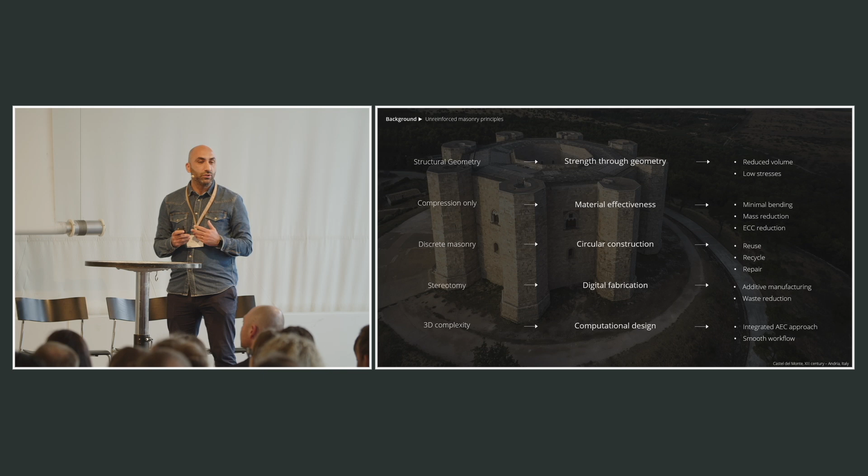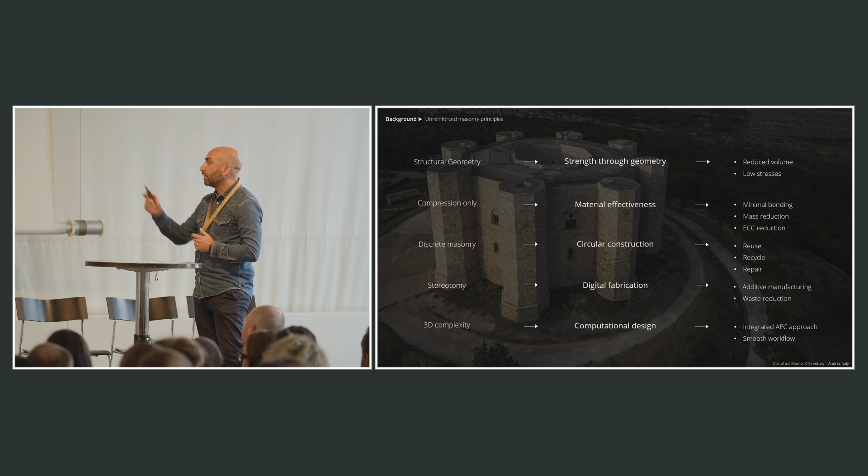The masonry behavior, which is, let's say, influenced a lot by stereotomy, is solved by digital fabrication because we have a certain flexibility of creating shapes through additive manufacturing. And the 3D complexity of masonry is dealt with through computational design. So we could now work with three-dimensional geometries, calculate them structurally, and build up an integrated approach from design to fabrication. So how did we translate this into a 3D concrete printing structure?

First of all, we built a discrete masonry structure working in compression, and we shaped the single components in order to have all the layers always perpendicular to the flow of forces. So you see the layers are not horizontal, but they are inclined, and they also have a different layer height in their development.

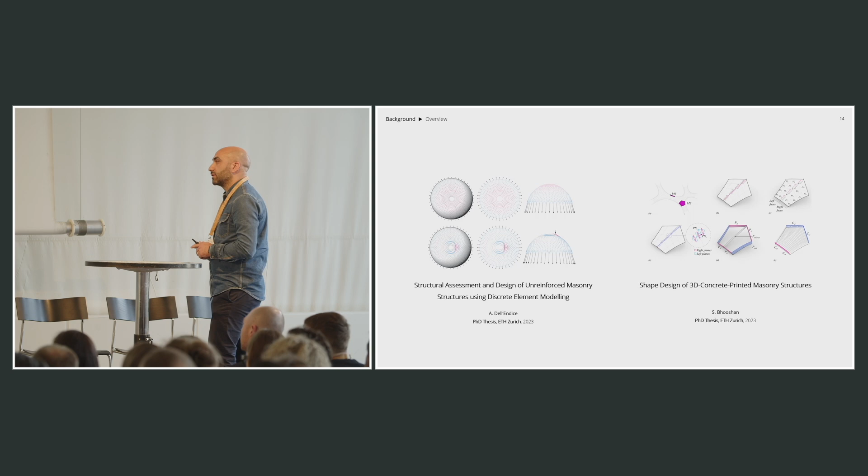This research is based on my PhD at the Block Research Group on structural assessment and design of unreinforced masonry structures using discrete element modeling, and on the PhD of Vishu Bhooshan about shape design of 3D concrete printed masonry structures.

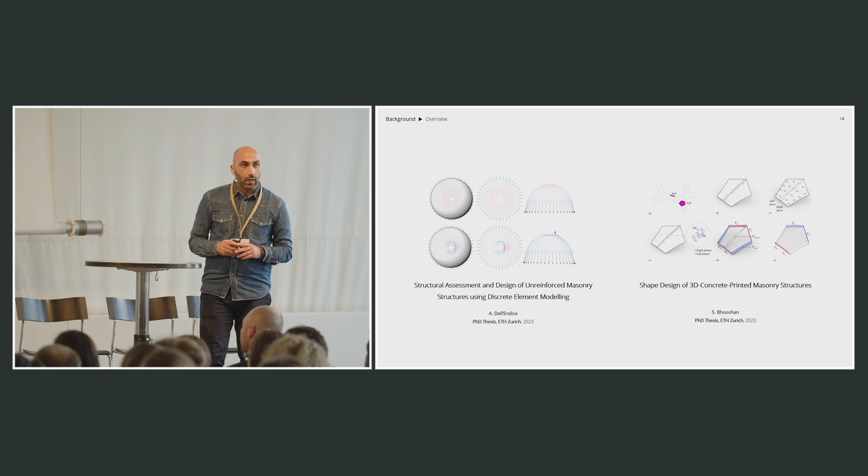When we worked on the first bridge, Striatus, we actually blended these two research lines together, and we generated this really integrated approach from design to fabrication, where we started simply from, let's say, a JSON file containing a data structure, network, and 3D meshes, and then we expanded this mesh. You see, we started with the skeleton on the top left. We expanded the mesh in 2D, and we used this mesh as a form diagram for the thrust network analysis.

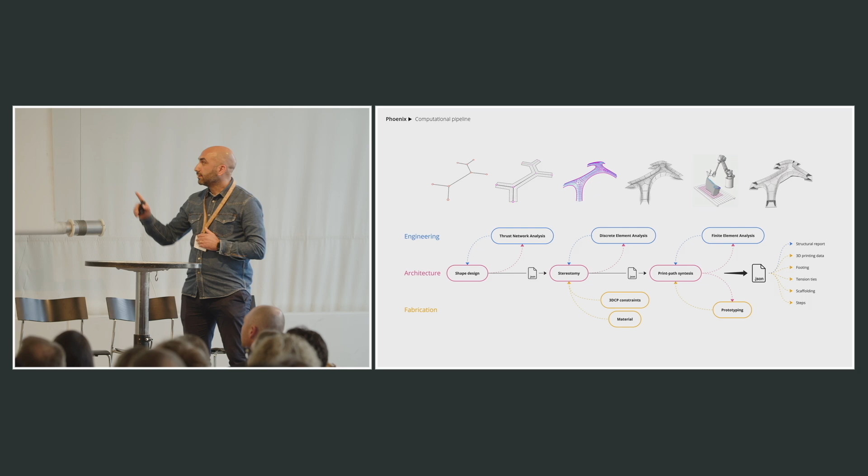So as you can see in this diagram, the structural analysis is interconnected with the design, and we always have feedback loops along the path in order to inform our design process. So after the form finding through thrust network, we gave this mesh thickness, we discretized the mesh, and we checked this through discrete element modeling analysis. So we understand the global equilibrium, the displacement capacity, and the load combinations. And at this point, we also introduced all the constraints coming from 3D concrete printing and from the material properties.

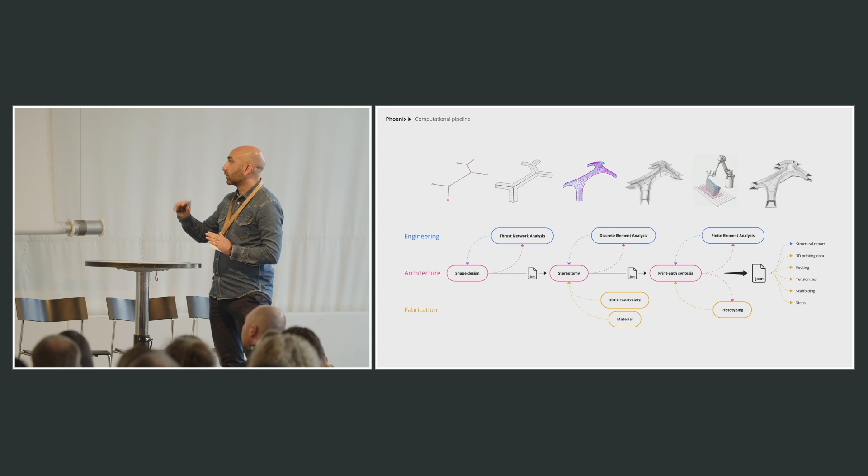And then finally, we checked locally with finite element analysis in order to define the thicknesses of the layers and, for example, the stiffening scheme inside the structure. And we populated this JSON file with all the data for fabrication, for structural reports, and for the robotic 3D printing of the structure.

Now, after the first project, Striatus in Venice, we wanted to improve the first bridge in a second iteration. And we did that not only thinking about how we could improve in terms of transportability, maneuverability, and assembly precision, but also how we could reduce the environmental impact in these structural typologies. So we worked a bit on the equation of the global warming potential. We decided to reduce single-use materials, for example, for the construction of the waffle, the falsework of the bridge. We wanted to reduce the ECC by using a lower strength concrete. And we increased the lifespan by building a permanent structure, compared to Striatus, which was just for the Biennale.

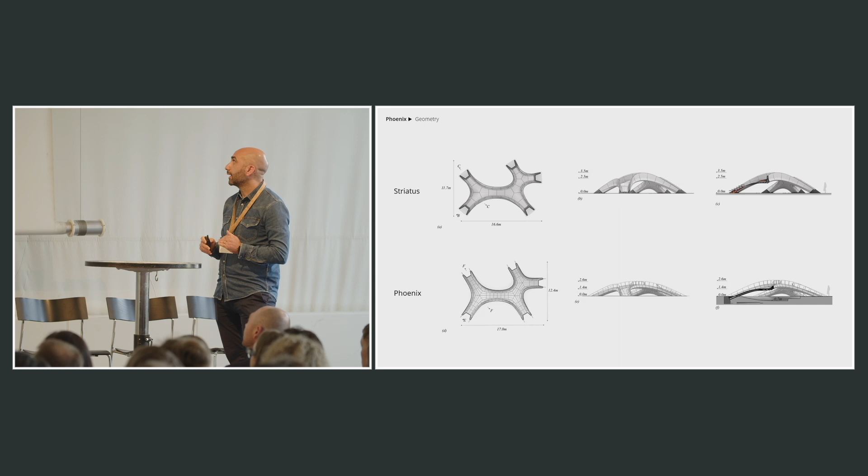So I will now guide you through the different steps from Striatus to Phoenix, and I will list all the different features and the comparison between the two. From a geometry point of view, we slightly increased the span, so the span is almost the same, but this structure, the Phoenix one, is much more shallow, so it's more suitable for a pedestrian bridge, so we could get rid of the timber steps, and we already save some material there.

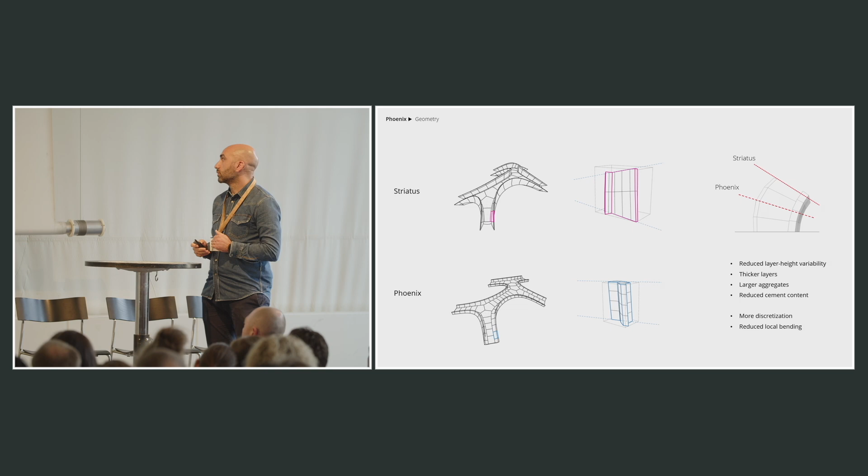But on the geometry side, we also increased the number of blocks, so it's almost double. And by doing this, there are a lot of benefits. First of all, we reduce the angle between the start and the end plane during printing, which can reduce the layer height variability. We could use thicker layers, which means larger aggregates, and also reduce cement content in the mix. But more discretization also means that we could reduce local bending, from a structural point of view, in the single components.

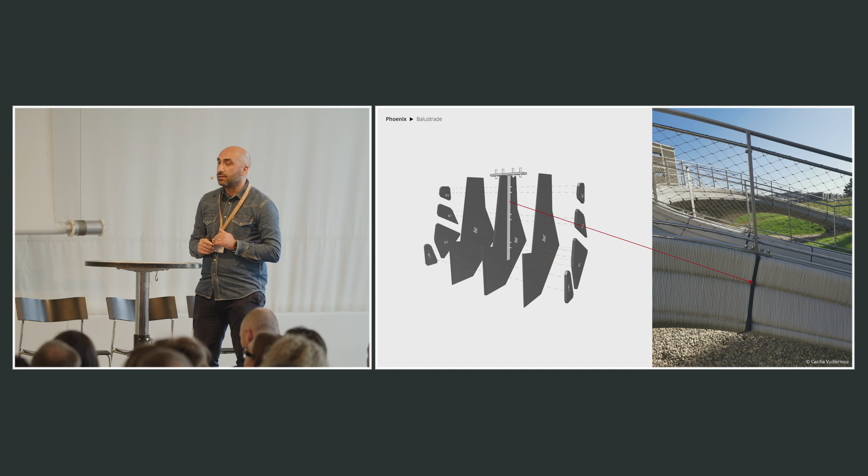In this case, we also integrated a balustrade, a standard steel balustrade, giving more transparency to the project. And we did that by inserting this steel T element in between the components, which is kept in place simply by the thrust flowing into the balustrade arches on the two sides of the bridge.

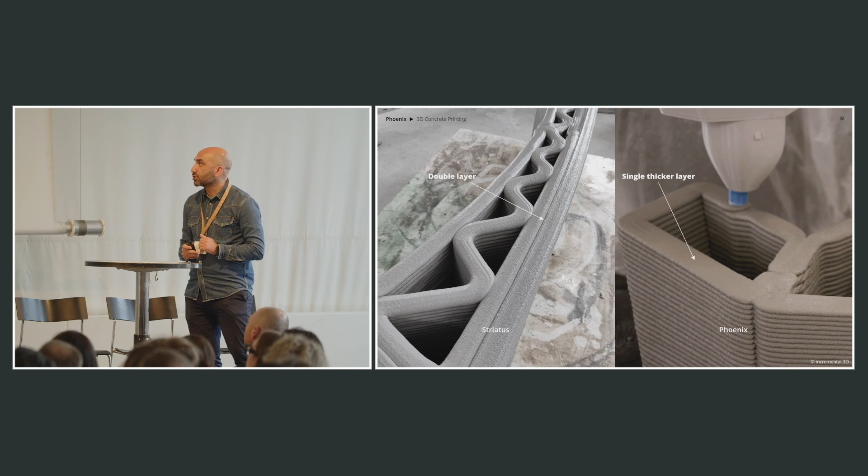From a structural point of view, we increased the global thickness of our geometry in order to increase the equilibrium solution space, especially for point loads or asymmetric loads, which are, let's say, the worst load cases for this type of structure. And locally, we also went from double layer printing, which could give rise to cold joints between the layers, to a single thicker layer running around the 3D printed components.

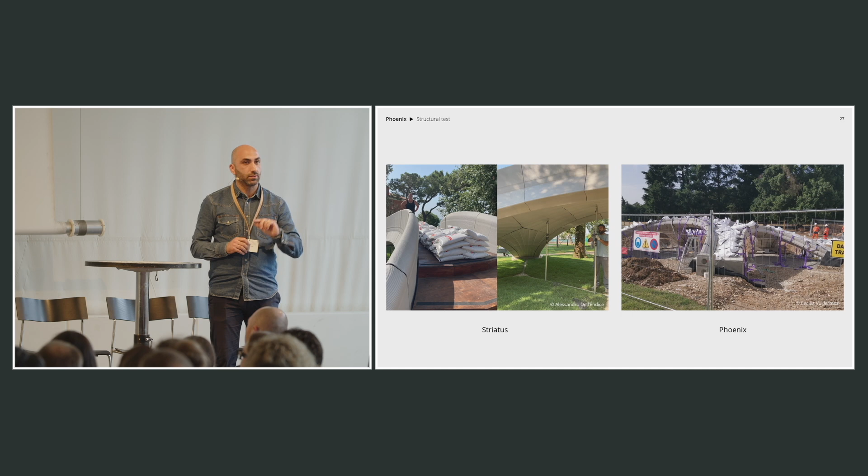And both structures were designed considering all the requirements from the Eurocode, so ULS, SLS, and they were all tested afterward with sandbags in different locations to check basically the deflections under certain loads.

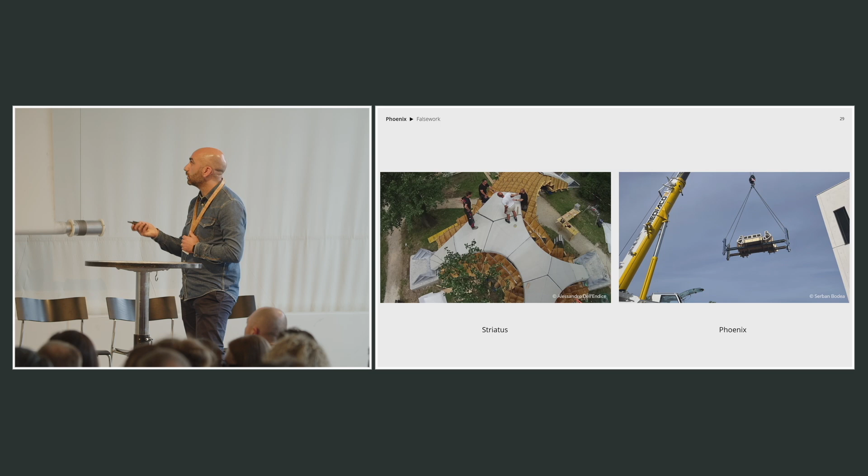On the falsework, we went from this continuous timber waffle with a lot of wood that we built in Venice to a different system with cassettes, which were integrated with commercially available Doka elements, so these blue beams that you see around the components. So we could reduce by 50% the use of wood per square meter.

And we also increased the precision during the assembly because we pre-assemble these cassettes with a few components on top, and then we lift them up on top of Doka towers, which were placed along the skeleton of the structure.

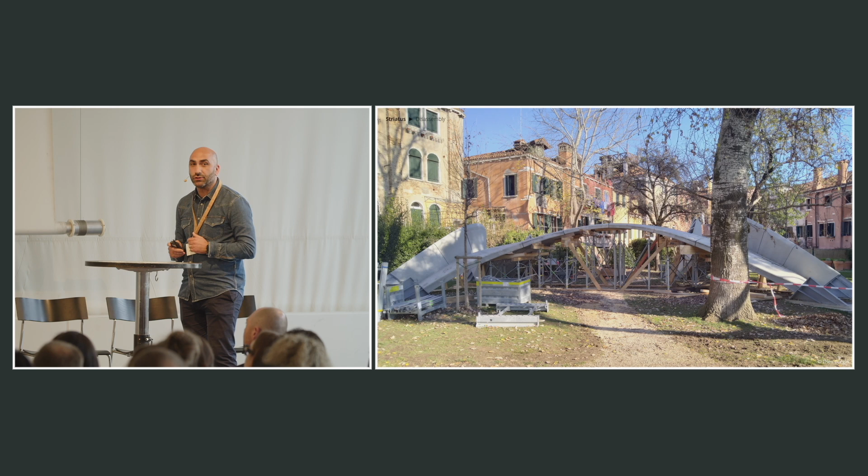On the material side, this is an image of the disassembly of Striatus in Venice. And after disassembling all the components, we smashed these components and part of these particles here were used as new aggregates for the recipe of the new concrete.

But not only that, so the development between Striatus and Phoenix concerned also going from a 90 megapascal concrete, so a high-strength concrete with the maximum diameter of aggregates about 0.6 millimeters, CEM II, to CEM III concrete with 50 megapascal, so we could reduce a lot also the environmental impact of the mix.

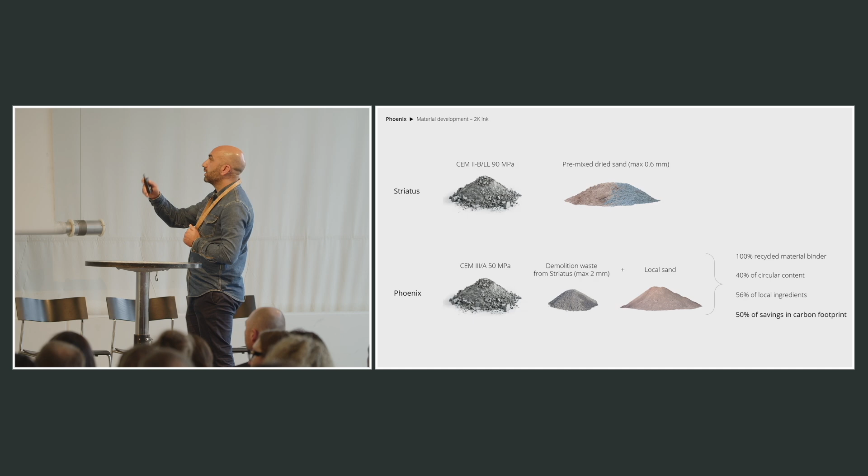Coming from 100% recycled material, we use part of the demolition waste from Striatus. We could increase the aggregates to 2 millimeters, and we actually use local sand. So it was a local sand closer to the plant where we printed the components.

On the assembly side, we changed the strategy. So we decided to start from the middle. This is a bit unusual compared to what is usually done historically on masonry structures. So we started from the middle, and we wanted to accumulate all the imperfections at the latest interface between the last block and the support.

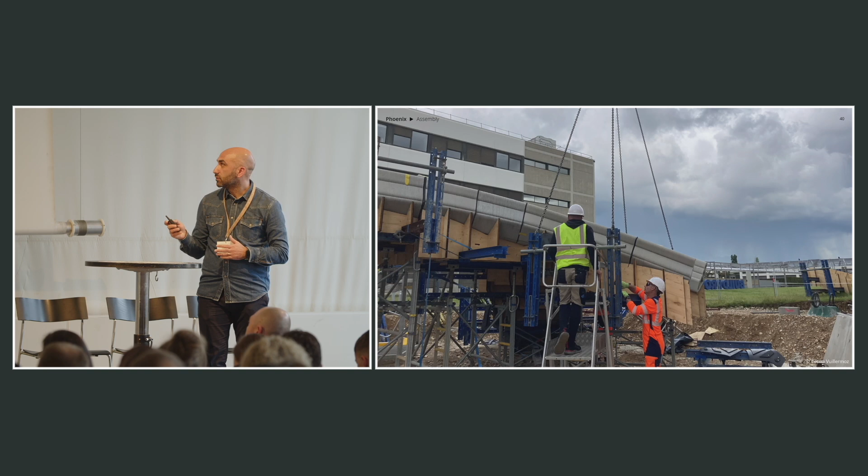So you see here, we proceed from the middle towards the support on the right side, and then we fill the remaining gap with mortar at the end of the process.

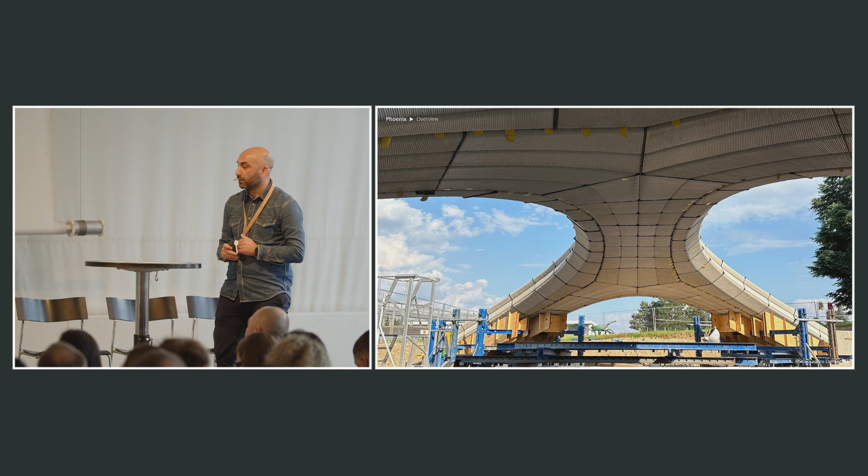Finally, I want to show you just a few pictures of the project. This is right after the decentering. This is the structure before mounting the balustrade, so the handrail on top of it. You see the connectors coming out in between the balustrade arches on the sides. And these are a couple more images in the Holcim Innovation Center in Lyon.

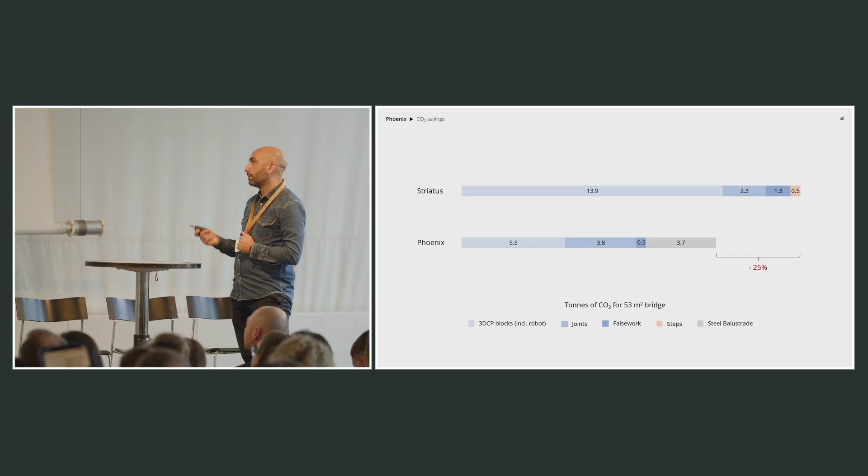And so to conclude, I want to show you this slide, which is showing the CO2 savings compared to Striatus. Of course, here we added the steel balustrade, which is also made of components that can be disassembled, so it's not really connected to the building, so it can be reused.

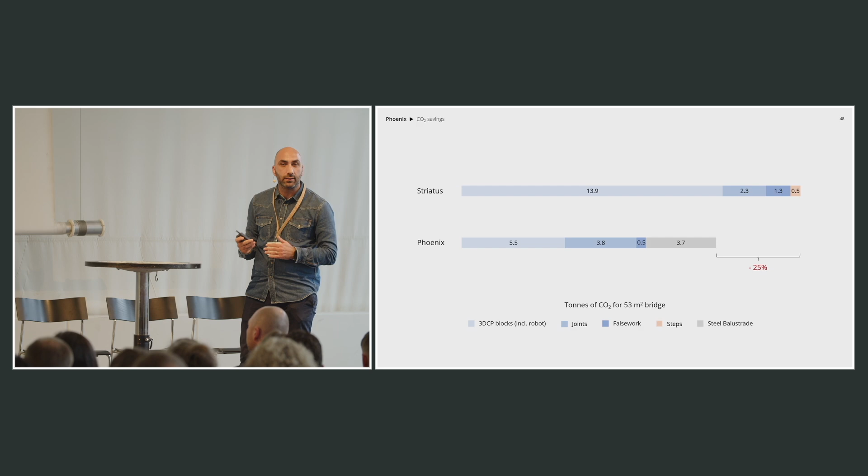And we realized later that there is a big contribution there from the joints, because we doubled the number of joints, the number of blocks, but then we also increased the neoprene pads in between. So this is just to say there is still room for improvement in this process.

And I want to conclude with this diagram, which shows how the implementation of our unreinforced masonry principles together with 3D concrete printing is quite beneficial for circular construction. So in this project, we are using 3D concrete printing as a primary structure. So there are no cables, no reinforcement inside. So we can start with a low emission concrete. We could reduce material because we are using additive manufacturing.

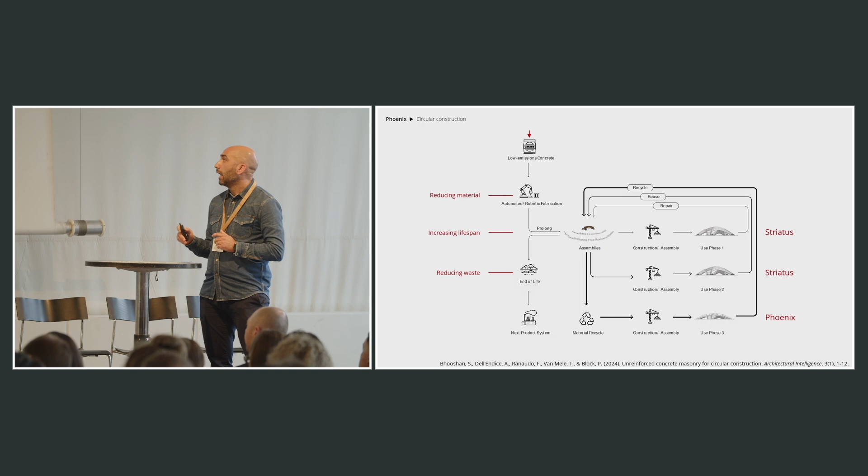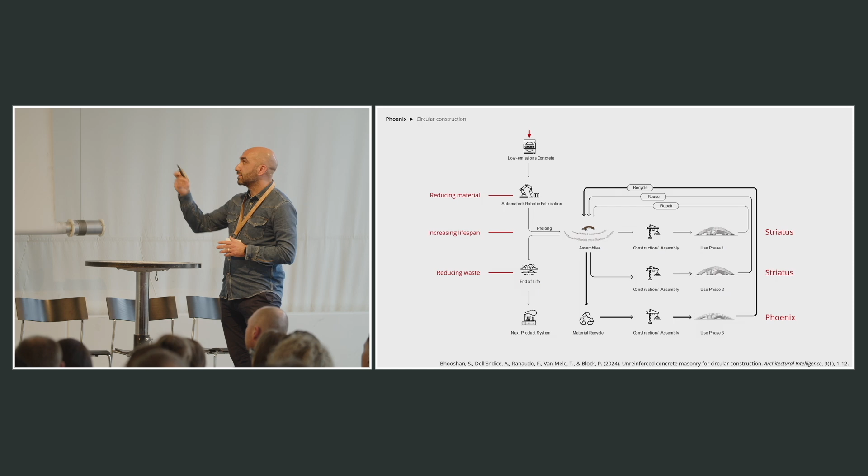And thanks to the masonry principles, we can go through these loops, so we can repair our structure, we could reuse it, so we can disassemble it and move it somewhere else, or we can recycle, as we did going from Striatus to Phoenix.

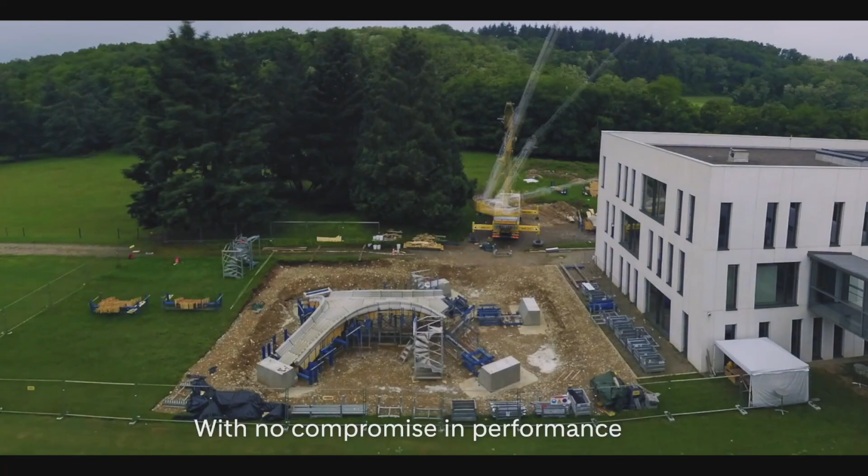This is a 40-second video to show you the final results in Lyon. Assembly of the cassettes, and the assembly starting from the middle, going towards the end, towards the supports.

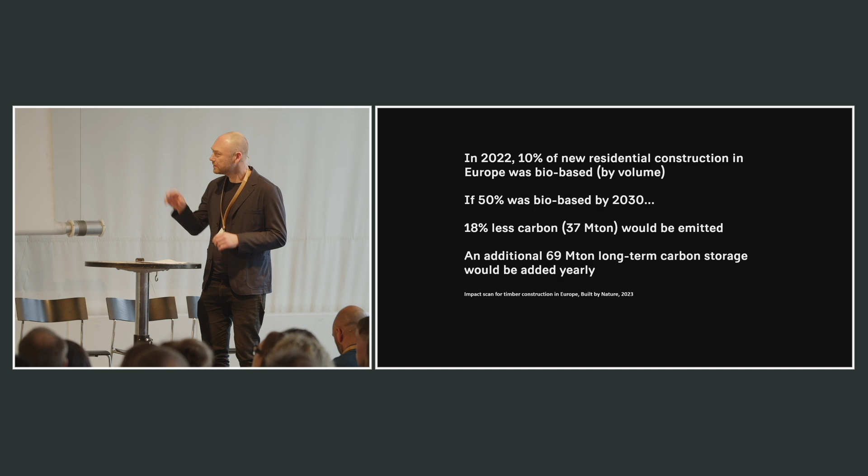But to be able to get anywhere near these very positive impacts, we first need to consider where the sources of these materials might come from. And this raises critical questions of how we should do this within the carrying capacity and sensitivities of our local ecosystems, and particularly how we should do this without simply shifting the burden to another planetary boundary.

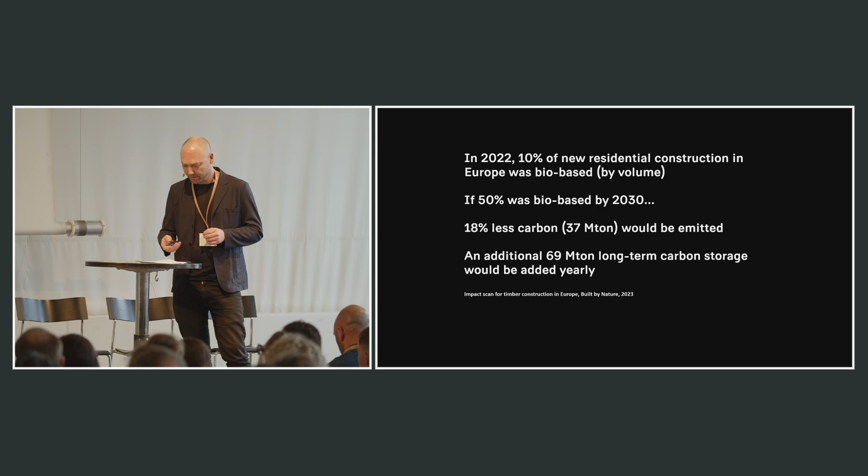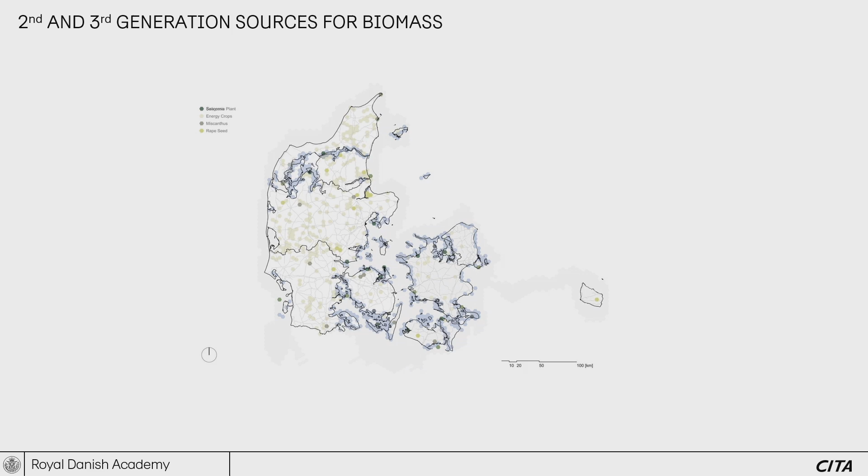So the region that we're in now, Denmark, southern Scandinavia, has a landscape that's about 70% agricultural. It's a fully utilized landscape that's cultivating feed, food, and energy crops. However, this same landscape and the same cultivation practices also generate substantial quantities of what are called second and third generation biomass. So this is the residues, the wastes, the cut-offs, the unused parts of first generation plants and trees, as well as uncultivated biomass such as seagrass.

And this kind of biomass has cycles that are very, very rapid. So a few months to grow, a few months to decompose, and this is even quicker if it's burnt for energy return. So being able to create new slow loops that redirect these waste materials into building elements would increase the overall quantity of biomass that we're able to use within building materials and building elements. It would also sequester their carbon for hopefully substantial periods of time, and it would also reduce pressures on other critical biomaterial resources.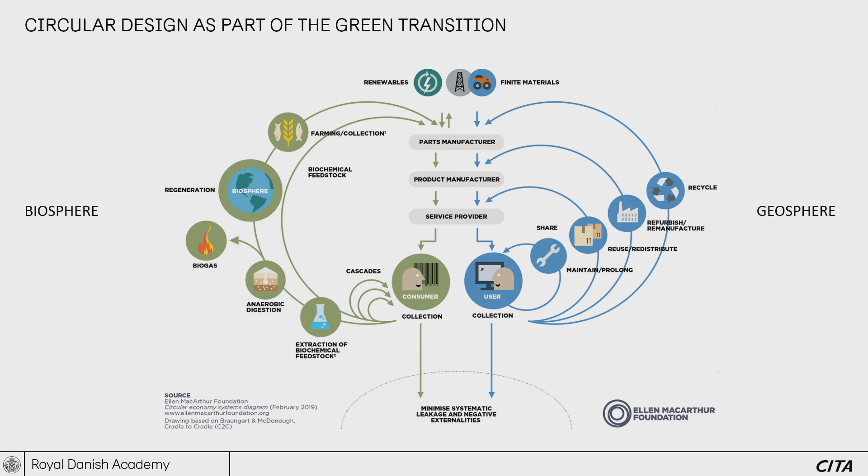And what we argue in our paper is that as we begin to create these loops, we need to embed our approaches in some of the realities of waste biomass sourcing and cycling, which are actually obscured or left out of a diagram like this, as it strips those resources and flows from their contexts.

So the first of those realities is that many of these flows are not constant. The resources may be there, but they may not necessarily be there or be abundant when you need them. The available quantities of biomass and biomass residues vary year to year as they're affected by unpredictable events such as droughts, heat waves, rains, diseases, or other competing uses that might suddenly assign value to that waste.

A second challenge is that the properties of the materials are also variable. So, for example, the tensile strength of materials like hay, flax, or hemp residues can vary up to 30% based on local agricultural practice, soil nitrogen fertilization levels, sowing densities, as well as local climate dynamics.

And then a third challenge is that once these materials have entered into our building cycles, it's easy to think that they should replicate the same kinds of cascades and cycles that we have set up for technical materials, and to forget that many of these materials come in with quite unique properties, and this gives us a way to open up new logics for architectural circular design.

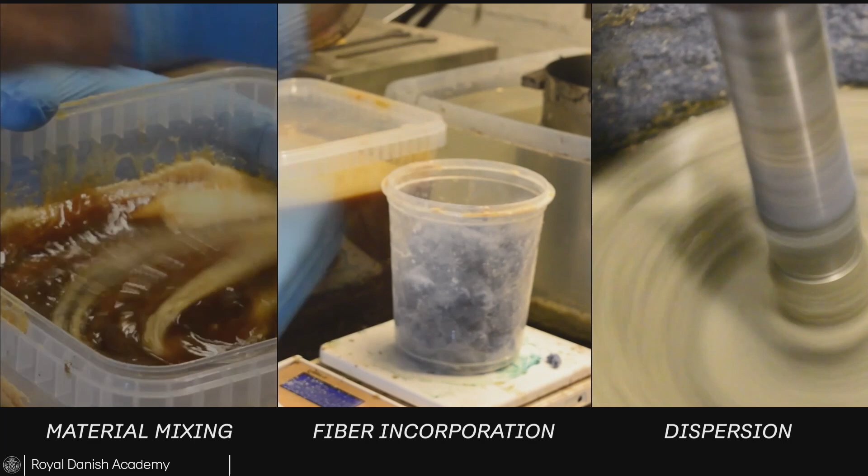Almost anything that we have been able to find has been tested through this material system. With the addition of water, heat, and glycerol, this material takes on a thermoplastic-like behavior, which is something that's quite rare for biopolymers. And this means that we can heat that material up, we can disperse fibers and fillers into it, and then we can 3D print it using a heated extrusion system.

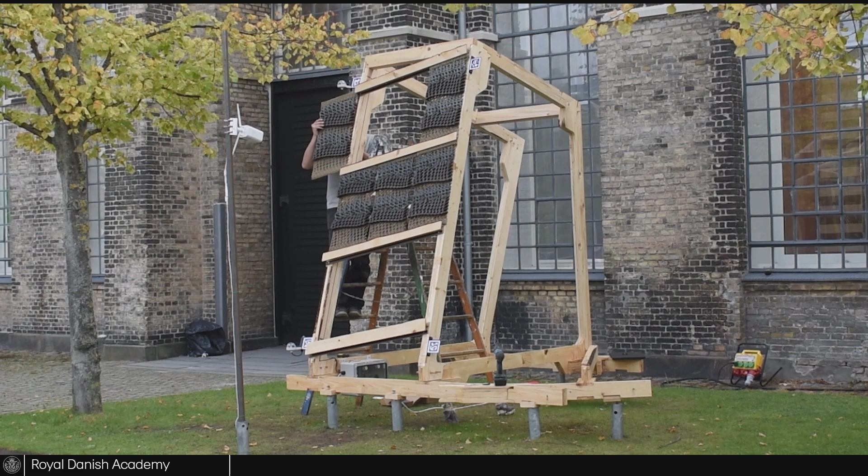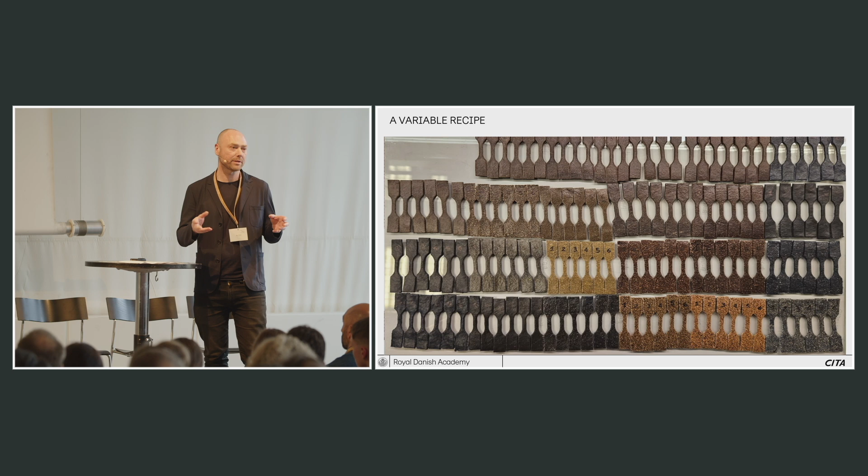Once those prints have cooled and dried, they gain the properties of strength and stiffness that make them well suited perhaps to non-structural architectural objects such as panels or cladding systems. So a key aspect of the material system is that the types and the ratios of the fillers and fibers that we're putting in are variable and interchangeable. So we can dial things up and down. We can select and combine these constituent materials in different ways, depending on what's available, or to gain particular desired strength or stiffness properties, color or texture.

And then also this physical recipe space of grading is also represented in an associated digital recipe space, which connects material recipes to their various performance parameters. So rather than trying to hone in on one particular optimal recipe, which would be a fragile solution in a dynamic resource context, what we are trying to do with this material recipe and its paired material recipe space is to create a flexible solution space that could be searched, extended, adjusted in response to changing material availabilities. So in a sense, it's to set up a kind of safety net. So if one resource is not available, this is a tool that would allow you to quickly find a suitable substitute.

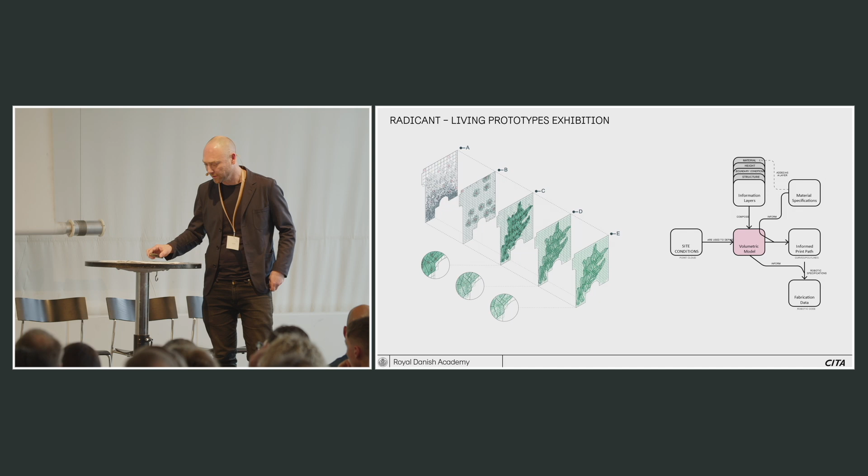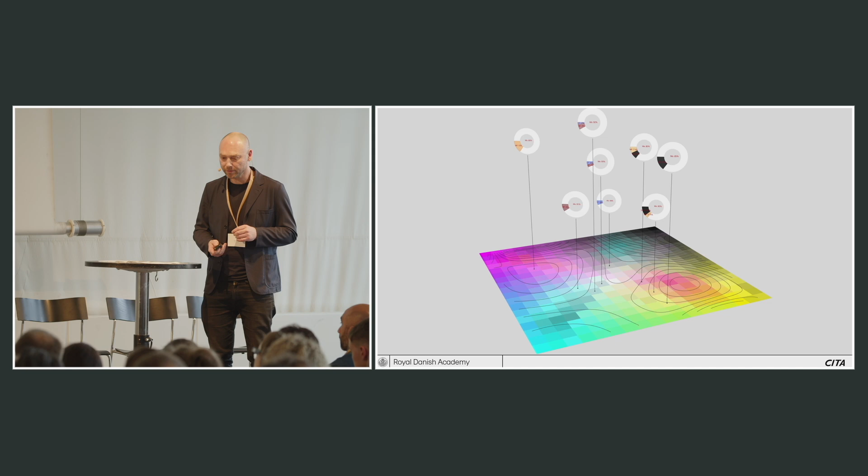And we've been developing different demonstrators that start to connect the breadth of that recipe space to the design of architectural panels. The first of these explores a retrofitted interior paneling system. It's actually in the rear wall of the exhibition behind us here. Here we have a generative algorithm that's responding to an existing wall by creating porous panels that include connection points, structural paths, and non-structural infill areas. In this case, materials are sampled from that recipe space for their structural properties, where several alternative materials are actually used where similar properties are found. And then we also sample that material space to achieve a stepped color gradient through the infill areas of the panels as they move up the height of the wall.

And here you see the two sets of specifications that inform each of those panels, and then their combination within single consolidated printed panels.

A second approach, I'll just get the clicker working.

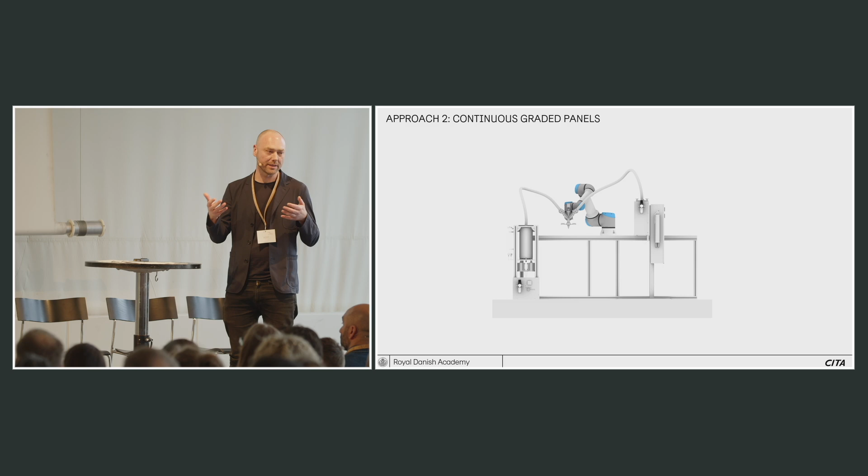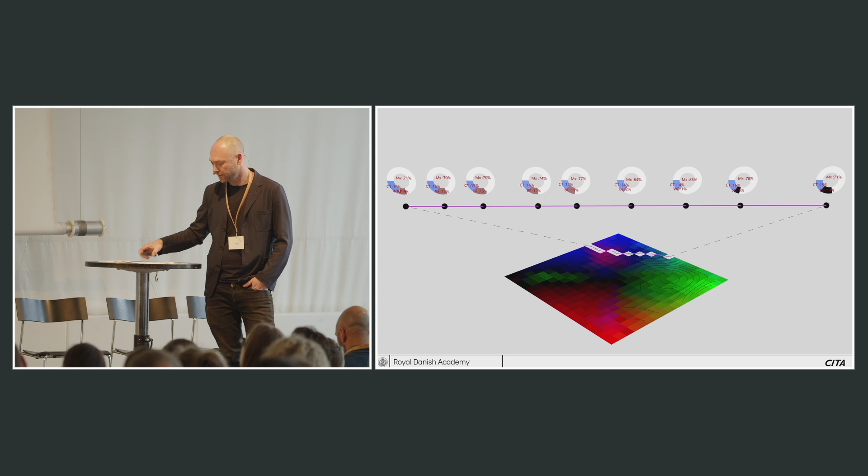A second approach is to connect multiple material streams at the nozzle. So instead of creating stepped graded structures, as in the first demonstrator, we're able to grade continuously through these panel elements and achieve a continuous graded blending. So in this case, the specification does not need to be disconnected samples from that recipe space, but can actually be taken as a continuous walk along a contour through that solution space that connects changes and variations in the material recipe and maps them onto particular points of a print path. Here are some examples of the graded panels, which are also exhibited in the exhibition behind us. And the geometries here are connected to prototypical development of an exterior weather screen use case.

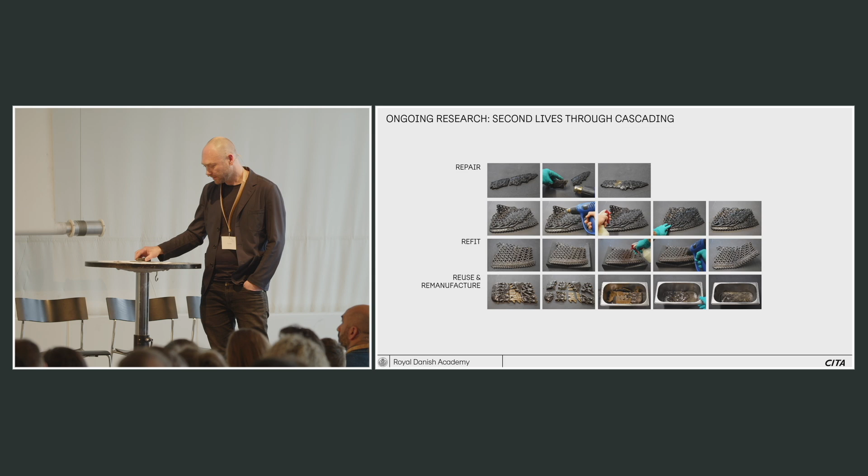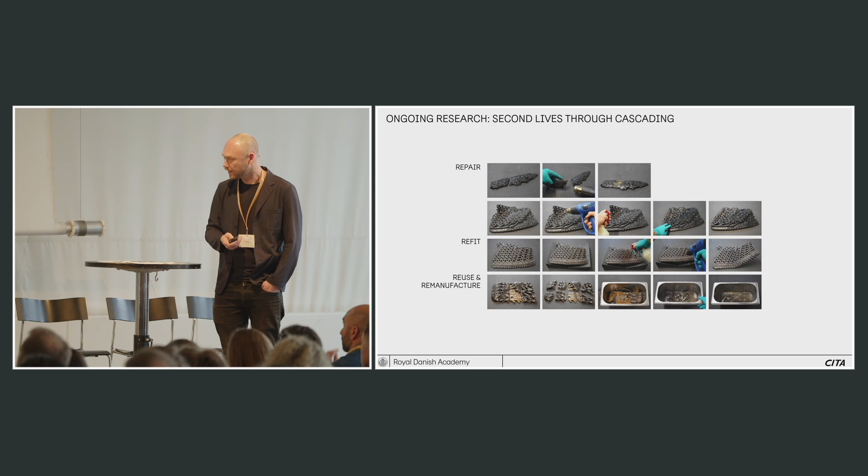So beyond the initial making of the objects, and also slightly beyond what's described in the article, it's also important to say that there's another wrapper around the research that focuses on how we can cascade and reuse this material. So how we can give it a long life by strategically activating the same thermoplastic-like behaviors as we use when we initially print the material. At a lower level of that cascade, we're able to reapply heat and water and perhaps top up with some glycerol to melt down and reuse exactly the same material ingredients, whether as a print mistake or as a panel that can become another object.

Beyond that, though, we have started prototyping some of these higher levels of circularity. So systems that have been printed and designed for one specific location, we're able to geometrically adapt them, bend them into shape so that they can be installed and fitted into a second location. And here, our project Radicant is reimagined as Ready Bent, which is what is installed on the back wall. And then lastly, damages can also be addressed through maintenance operations and repair, which are based on conformal printing strategies that activate the material's self-adhesion.

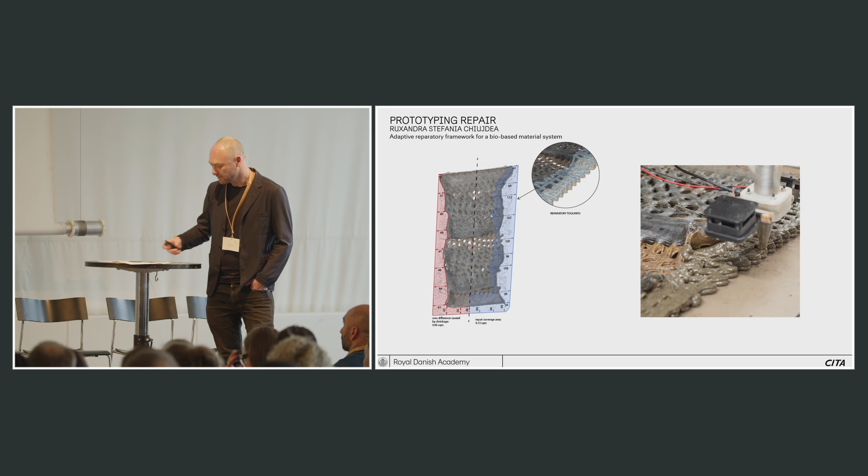And some extremely interesting PhD research by one of our PhDs, Ruxandra, pushing these forwards. So I think I'm pretty much out of time, but to summarize and conclude, I think the article really is asking how the prototyping of waste-based biopolymer composites can start to open up new models of circularity and reuse in architecture. And our argument is that for these to be flexible and robust, they need to be grounded in an appreciation of material availability and accessibility at a local level, and particularly in the case of bio-based resources and waste-based bio-based resources.

And then I think we also hope that in these prototypical panel designs we've also been able to show the potential for how those graded recipe spaces can be connected and activated through architectural design in the design of graded panels. Thanks very much for your attention.

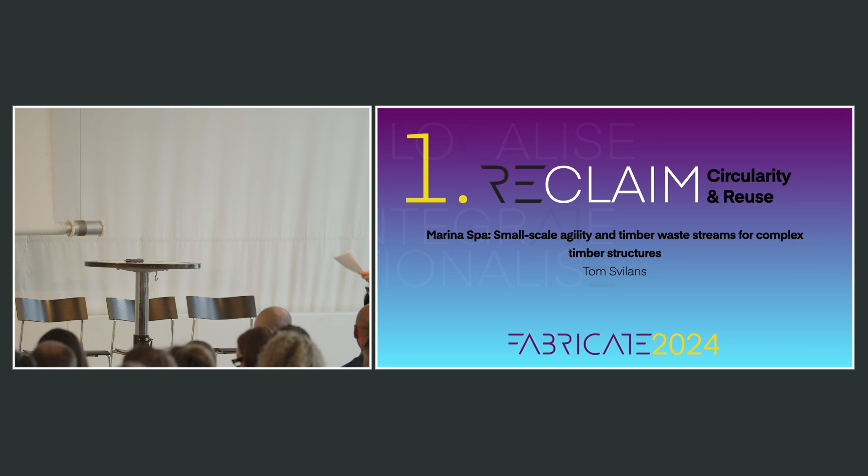So on behalf of myself and the rest of the project team, I'm very happy to present our project, the Marina Spa prototype, today. The project brings together an interdisciplinary and actually quite geographically dispersed team of professionals and academics. It was initiated and led by Norwegian architects Helen and Hard, Siv Helene Stangeland, Håvard Auklend, Simon Aeschlimann, and Reinhard Kropf. It involved 2 academic partners here in Denmark, so myself from the Royal Danish Academy, and Niels Martin Larsen, Anders Kruse Aagaard, and Mathias Haraldsson from the Aarhus School of Architecture.

It was guided and managed by Martin Antemann from Design to Production in Switzerland. Engineering advice was contributed by Hermann Blumer and Christoph Meyer at Création Holz. And then finally, the bulk of the fabrication and the delivery of the project was done by Morten Winther and his team at Winther AS here in Denmark.

So today I want to give a brief overview of the context of the project, describe a little bit how it was resolved through a digital modeling approach, and then focus on the 2 main resource streams that make up the project: crooked oak logs, and reclaimed timber from the production of flooring. And describe a little bit about how these were leveraged to create the final piece that we just saw.

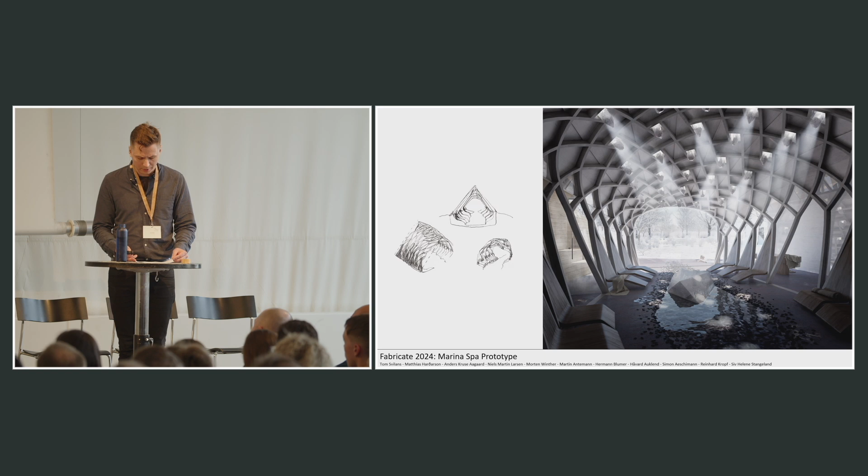The project itself was derived from an earlier unbuilt project done by Helen and Hard for this kind of enveloping, nurturing spa space. The design features a lattice structure made up of curved timber elements, which forms this overarching surface, formed out of this reciprocal timber structure at the top and supported by 2 rows of what we call the V columns at the bottom. And in between the V columns, there was this idea for seats and areas of rest and spaces for contemplation.

So very quickly, the first discussions revolved around the problem of how these elements could be produced and connected, trying to avoid complex double curved geometries that would require very intensive production techniques and trying to avoid non-wood connectors or extra elements. So the vision was to do it entirely out of wood. The discussion drew from the previous and ongoing research and experience of the academic partners, which also helped in prototyping alternative solutions and brainstorming how this could be accomplished given the involved know-how.

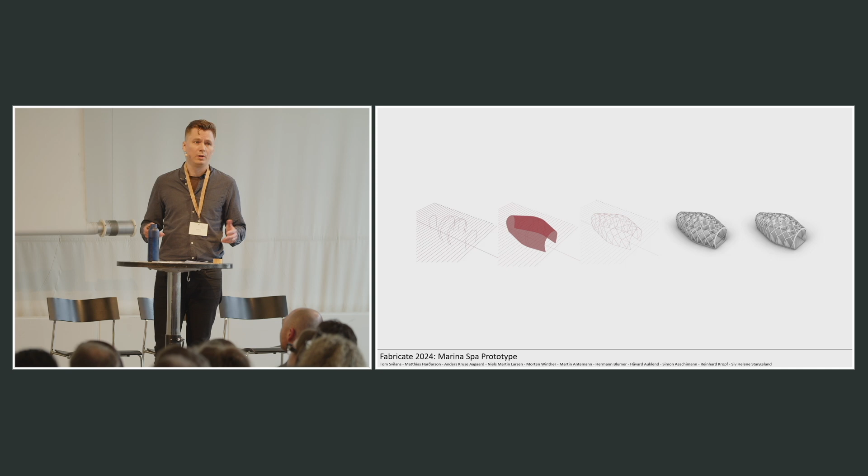So the project employed a fully digital delivery in the sense that there was a digital model at the core of the project that was the central source of information for its realization. And this was slowly built up in levels of detail in the kind of well-established method of using a master surface that's populated with center lines, which was then informing the volumes of the beams and therefore generating the element geometries.

The next big challenge was how to resolve all the many connections without any steel connectors such as plates or screws. So from the approximately 130 unique elements, there were about 120 unique joint conditions with no real repeating situations because every joint was slightly different in some way. So therefore the topology of the model had to be analyzed to find similar joining conditions and develop a kind of a family of different joint types that were further specified and adjusted for particular edge cases or particular situations.

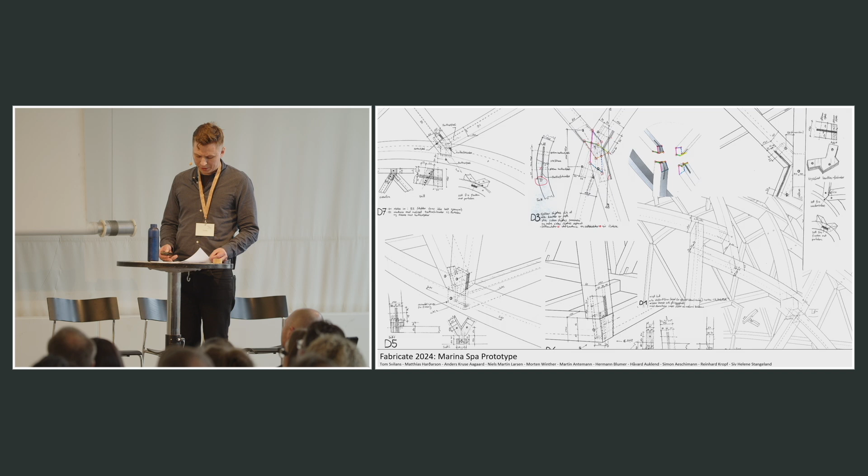This was solved in a modular way and through lots of roundtable discussions from the architects and the fabricators and everybody involved to resolve exactly how this would happen, how the geometries would be resolved, and how we could combine the knowledge to solve these joint conditions. So the whole discussion about resolving the joints took place in plenum with everybody's comments integrated into a series of discussions.

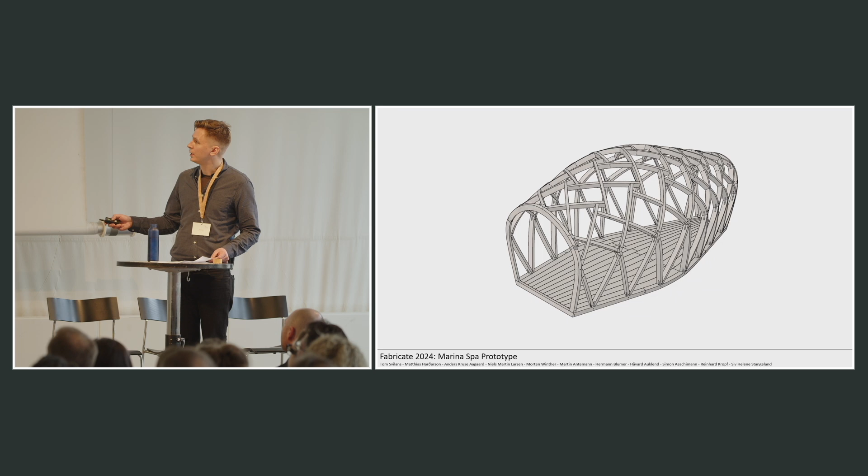So here you see the main components of the structure, beginning with the sill, beams, portal frames, the flooring, the V-columns, and then finally the reciprocal structure. And then the final family of about 9 different joint types, each individually also variated depending on where it was in the structure, what kind of particular conditions were different, and where it lay.

So the material waste streams. The first one I wanted to focus on was this: crooked oak logs, which are ordinarily discarded by the sawmills and used for firewood. And it leveraged ongoing research at the Aarhus Architecture School in how digital scanning and fabrication processes can enable better usage of such non-standard timber and its natural forms.

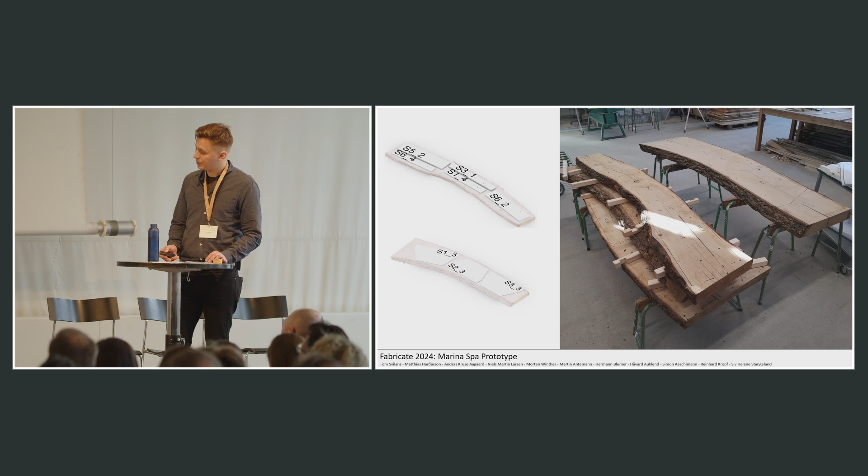The team at Aarhus used this research to collect, scan, and assess oak members that would be used to create the seats. The design of the oak seats was therefore broken down and allocated to specific timber boards, taking into account the presence of features and defects in the natural oak forms. So the oak was assembled and CNC machined into its final expressive form. And here are the finished seats sitting in the context.

And this is the second space of production, the workshop at Winther, where the rest of the production of the beams and all the elements took place. The second material stream used offcuts from a wood flooring company, Dinesen, here in Denmark again, to compose the main beam elements of the structure. Now the problem from the outset was how to create curved elements in a simpler way. Since glue laminating lamellas would require jigs and pressing equipment and quite complex infrastructure, it would be also quite expensive.

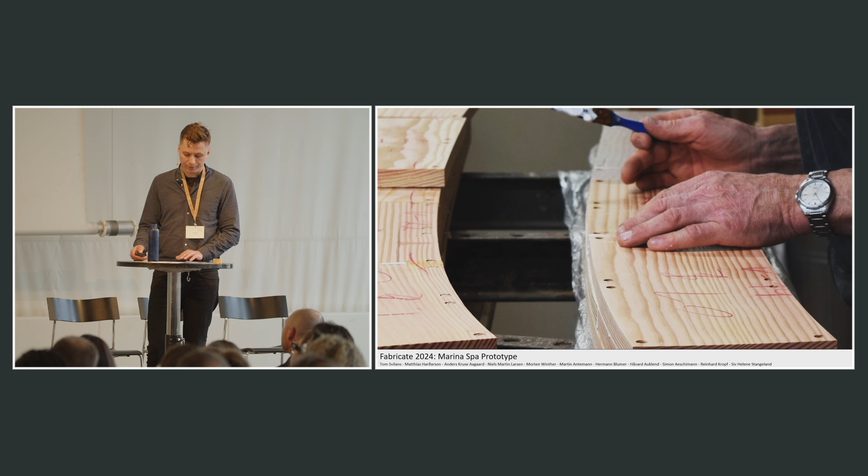Instead, a technique developed by Winther for creating curved doorways and window frames was introduced. So this had the benefit of being able to work with small pieces of wood and without the complexities of bending wood into curved shapes. It is kind of a small tiling of different segments into a larger form that can be much better controlled and glued simpler. So as a production technique, it simplified the process, albeit with extra machining and assembly work.

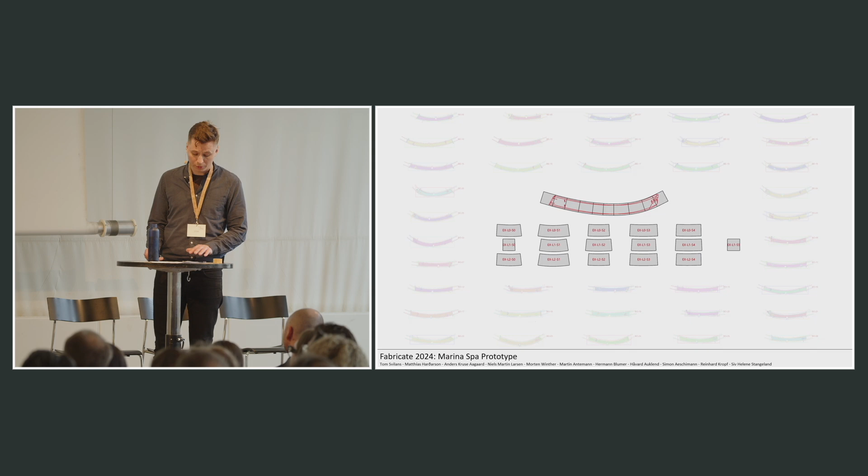At the same time, however, it introduced more demands on the digital modeling side. So now for each of the 130 elements, all the different segments were also required for the machining of the individual segments that would make up each beam element. An extra step was then also needed, matching each segment of each piece with the odd-sized offcuts from the waste wood to make the best use of the material, both in terms of form as well as in terms of looks and aesthetics.

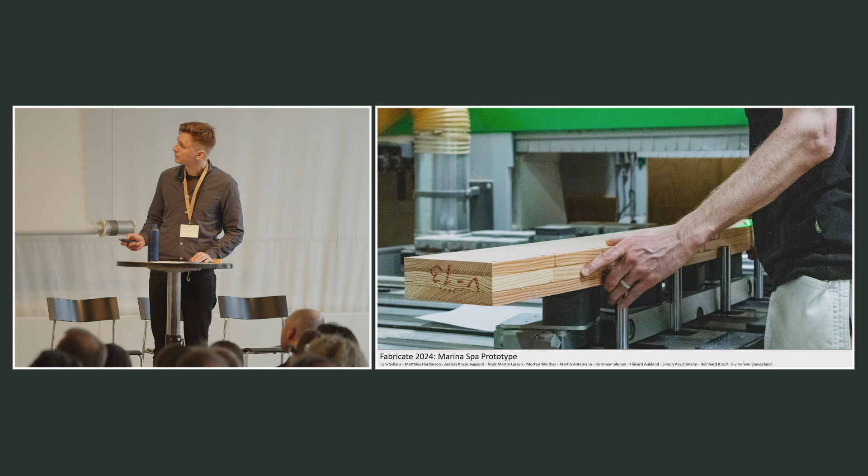So here are the finished blanks, made up of several different layers, and being placed on the machine. So translating the model geometries and the different joint types required a very close collaboration between fabrication and modeling. Parameters for individual joints were defined, and then the values for these were extracted from the model and fed into the machining program. So we started with the easy ones to make sure we could keep moving, and then we solved the harder ones as we figured things out, always trying to keep one step ahead of the game to ensure that we made it on time.

And not having such a tight and communicative team would have made such a process extremely difficult. So having this kind of close assembly of the team and being able to directly talk with all the other members of the team and work in the same space and constantly discuss things was an incredible asset here.

Yes. So the joints were assembled with plywood plates and oak dowels, which also had to be accounted for in the detail model. These were also a mixture of digital production processes and some manual finishing work, as you see here. Some more pictures of the plates. Again, each plate being different depending on where it was in the structure and what joint it was actually connecting.

So in the end, the elements were successfully machined, and most importantly, they fit. We had this kind of worry at one point that if we assembled the entire thing, it would be upside down, but that didn't happen, luckily. Because of the fast pace of the project, there wasn't time to do mock-ups or pre-assemblies or tests, so it was all relying on the skill of each individual team member and their expertise.

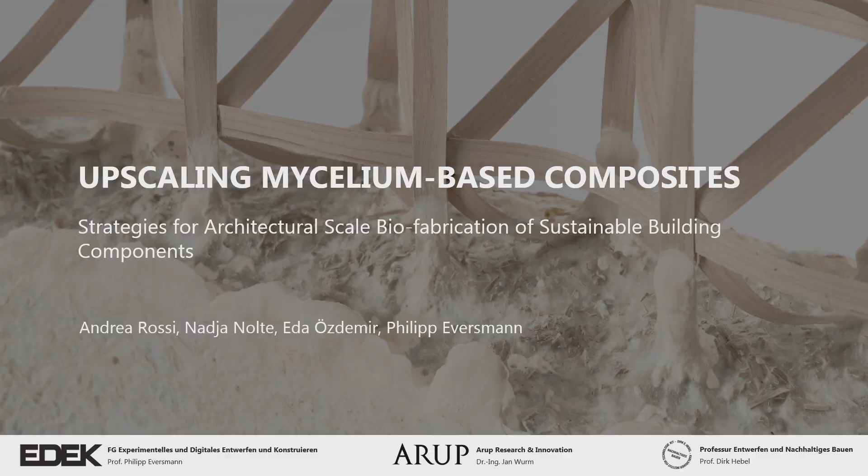The project that we want to present, called Upscaling Mycelium-Based Composites, is a collaboration between our team at the University of Kassel, the engineering firm Arup, and the Professorship for Design and Sustainable Building at the Karlsruhe Institute of Technology. The motivation for this research comes from the realization that interior fit-outs in commercial and office buildings have a huge CO2 impact on their production, particularly when we look not only at the production of the building in its first instance, but at all the cycles of refurbishment that a building goes through. The impact of refurbishing an interior building is incredibly high.

Partition walls, in particular non-structural partition walls, are usually produced using materials such as gypsum walls, which are highly unsustainable materials that can get discarded extremely fast. In recent years, mycelium-based composites emerged as new materials that can replace a lot of these more unsustainable materials for a variety of indoor applications. These materials are cultivated on different kinds of agricultural waste, using fungi as binders to join them into a material which has a variety of suitable properties for architectural construction.

What is the challenge? At the current stage, mycelium-based composites are unable to reach the structural dimensions that we need for panels for partition walls. It's very hard to make a 3-meter mycelium panel because it has relatively low tension and bending resistance. For this reason, we propose two strategies. The first deals with fragmentation, reducing a larger wall element into smaller parts while maintaining structural integrity through kinematic interlocking. The second translates a logic we all know from reinforced concrete: we worked on adding a tension reinforcement made of wound veneer inside the mycelium composites to allow much larger spans.

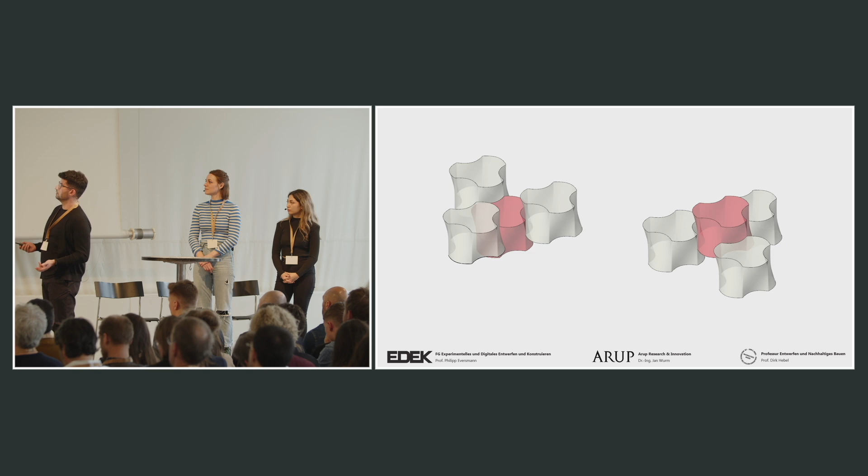The first strategy deals with fragmentation and how we can divide a large element into smaller ones while maintaining structural integrity. To do that, we rely on the concept of topological interlocking, a class of structural systems based on kinematically interlocking elements that can be combined in structures that transfer loads in multiple directions. In these patterns, each element supports 3 elements and 3 other elements act as support for it. So when we repeat this pattern over a larger structure and lock it at the ends, we end up with a structure that is able to transfer loads.

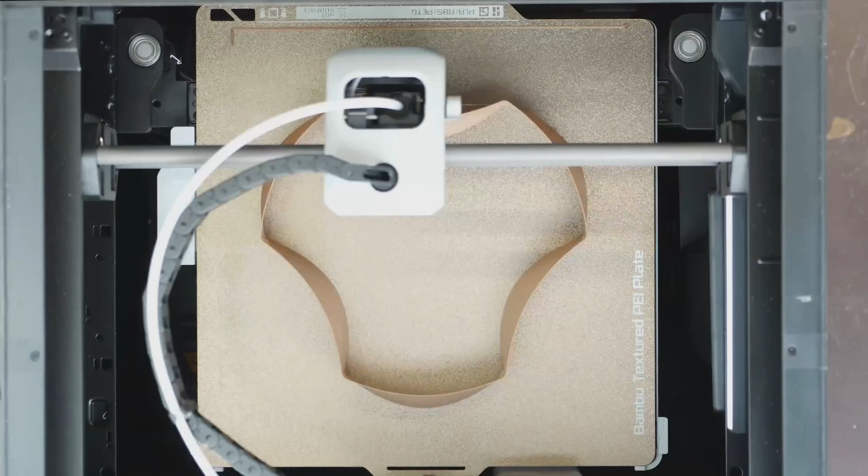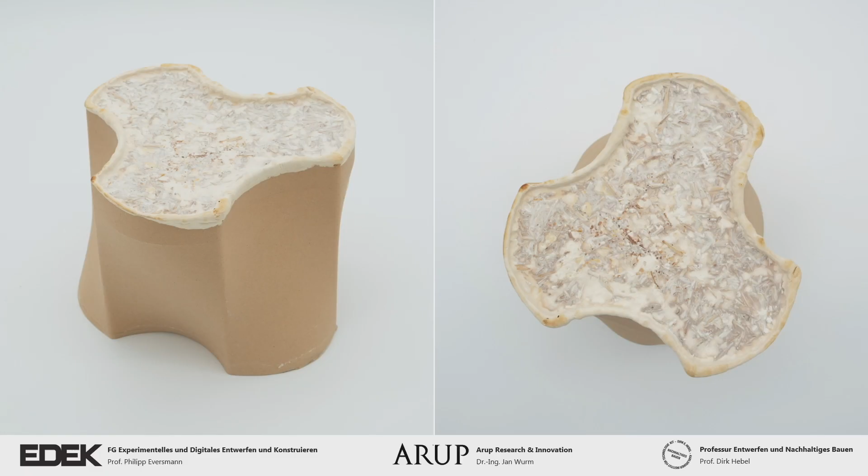However, we need precise interfaces. Mycelium is not known to be a material with high precision. Its production process has all kinds of non-uniformities and a lot of shrinkage, so it's very hard to produce precise blocks. For this reason, we developed a process combining mycelium composites with an additively manufactured lost formwork, produced using bioplastics infused with wood particles, that we use to cultivate these blocks. So we end up with a composite where the mycelium internally provides stability, and on the outside a precise 3D printed shell allows the blocks to properly interlock and transfer loads.

Unfortunately, or actually partly fortunately, we had a very strong bond between the outer shell and the mycelium composite. That means that despite its stability, we still got a certain amount of shrinkage, and because several people were filling the blocks and everybody had a different idea of what a filled block means, we ended up with a certain level of non-uniform shrinkage. However, we could tune the interlocking detail to ensure that despite the expected shrinkage, the interlocking would still work and still transfer the loads.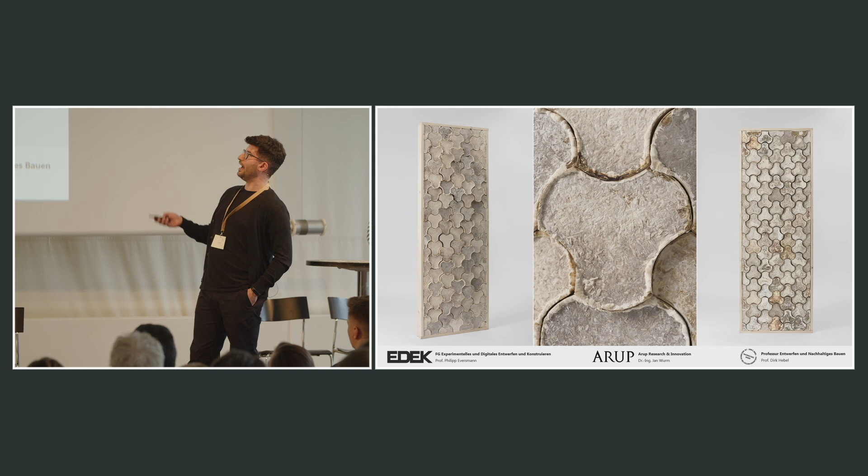So the resulting system is composed of around 100 blocks that compose a 2.40 m wall. And what is interesting is that these blocks are held together exclusively by the outer timber frame. And so by removing the frame, we are able to fully disassemble this wall and reuse it into a different structure. What is also interesting is that since the kinematical interlocking works in any direction, we are able to reuse the same blocks not only for a vertical wall, but potentially also for a horizontal hanging ceiling.

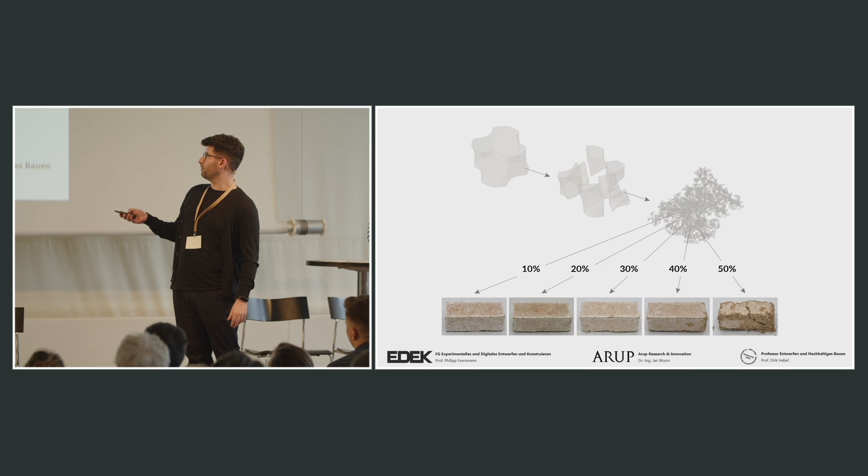And moreover, what's interesting is that at the end of life, the whole block can be broken up and shredded, and the material itself can be reused as a substrate for a next cycle of production with a reuse amount of up to 40%.

So the second strategy that we want to present to you today is, as mentioned, the strategy of internal reinforcement, which aims at allowing to produce larger elements in a single piece, which is obviously desirable for their application in construction. And the reinforcement is based on a wood veneer lattice that is integrated in the mycelium substrate matrix before the growing process. So during the growing process, the mycelium network can bind to the wood veneer lattice, and this can realize a reinforced component.

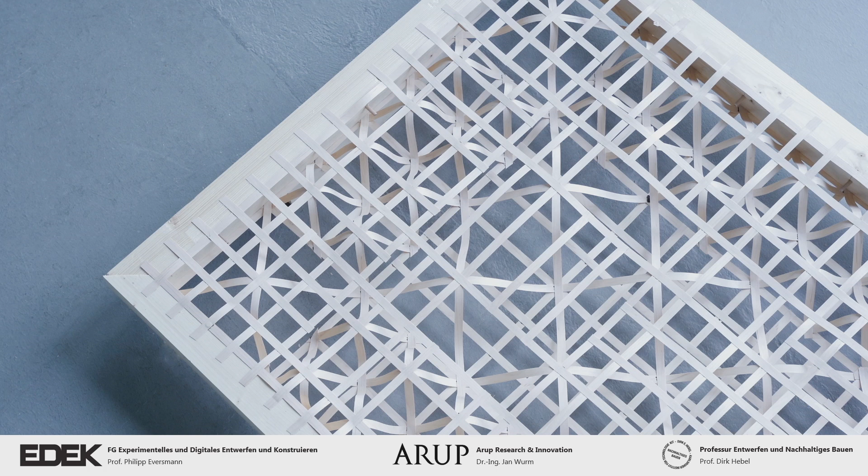We developed this strategy based on previous research, which has identified that the fundamental limits to the application of mycelium-based composites for large-scale architectural components are based on, as mentioned, poor tension and bending resistance properties. And the low tensile strength is largely due to the lack of longitudinal elements that can then transfer the loads across the component.

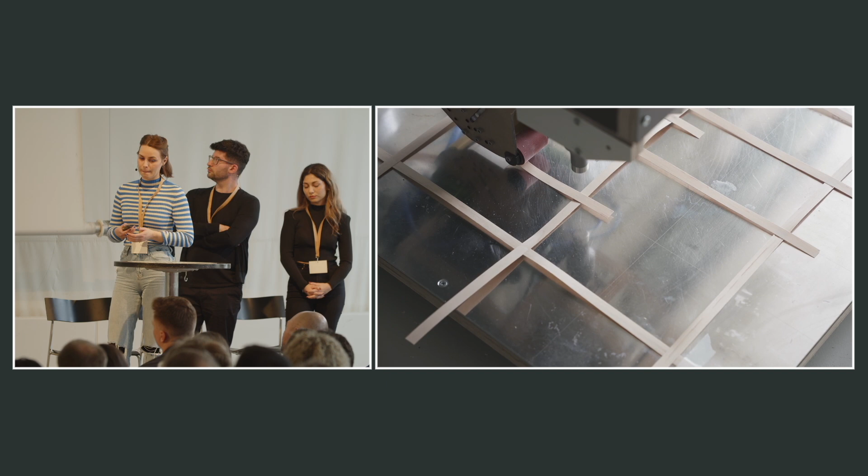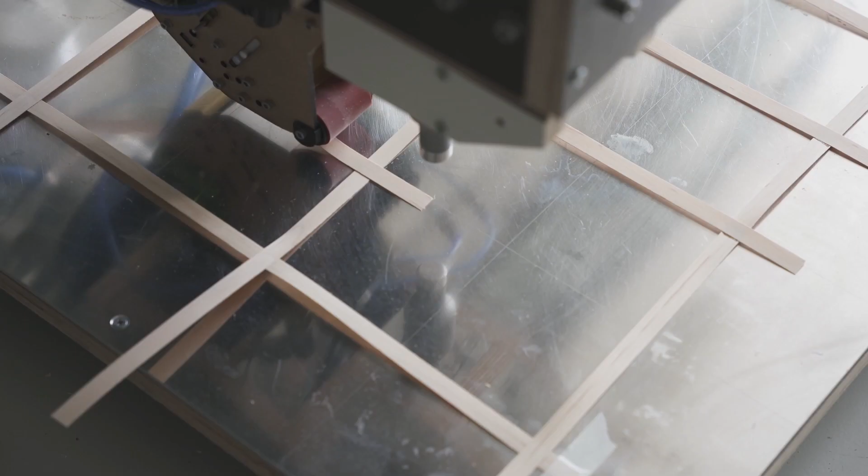So our process is relying on a 6-axis robot and a custom-made end effector, which allows the extrusion of the veneer strips in selected locations, cuts them and binds them together to already placed strips. The lattices were manufactured from thin edge-banding rolls of maple wood veneer, which introduce the long fibers into the composite that can be oriented according to the stresses in the geometry. The long fibers act as a reinforcement such as they do in traditional high-performance composites such as steel-reinforced concrete, and also they perform as a natural scaffolding for the mycelium growth.

A key challenge during our development was the identification of a bio-based binding method that would keep up with the process speed. Most bio-based binders either require long curing times or they require to coat the veneer completely in the binder, which would negatively influence the veneer mycelium bond strength. Hence, we avoided using any binder and we introduced an ultrasonic welding process, which is usually applied to thermoplastics, and it is economical and automated and well suited for mass production.

The ultrasonic welding uses a titanium horn that vibrates at high frequencies while being pressed on the material. And the kinetic energy is then transformed into thermal energy, which melts the lignin which occurs naturally in the wood veneer and binds the strips together in a fraction of a second. And we did some tensile testing and demonstrated that these bonds are actually stronger than the veneer itself. And so we proved that this is a suitable method for the production of the veneer lattices.

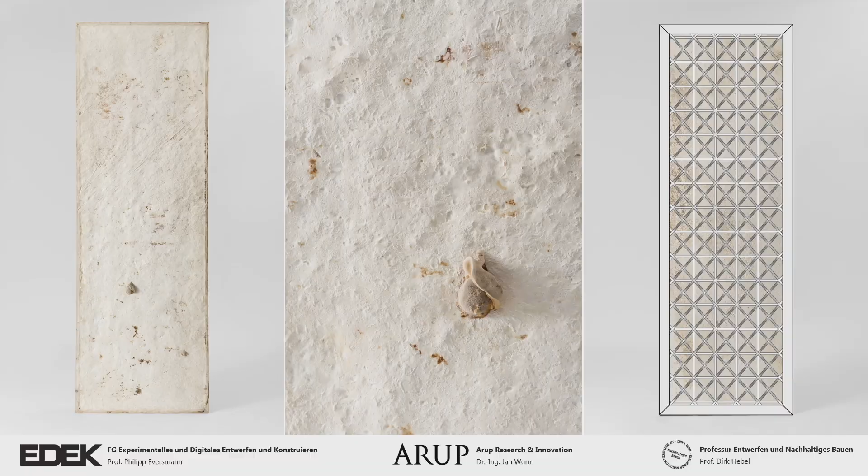Later on, we filled the lattices with a mycelium substrate. And within 1 to 2 weeks of cultivation in a controlled environment, the lattices were grown together with the mycelium substrate, creating the stable composite. Thanks to the veneer lattice fabrication method that we've developed, we made a full-scale partition wall that has a uniform lattice embedded in. This lattice is connected to an outer frame, as mentioned before, that increases stability and improves the bending and tension resistance of the composite.

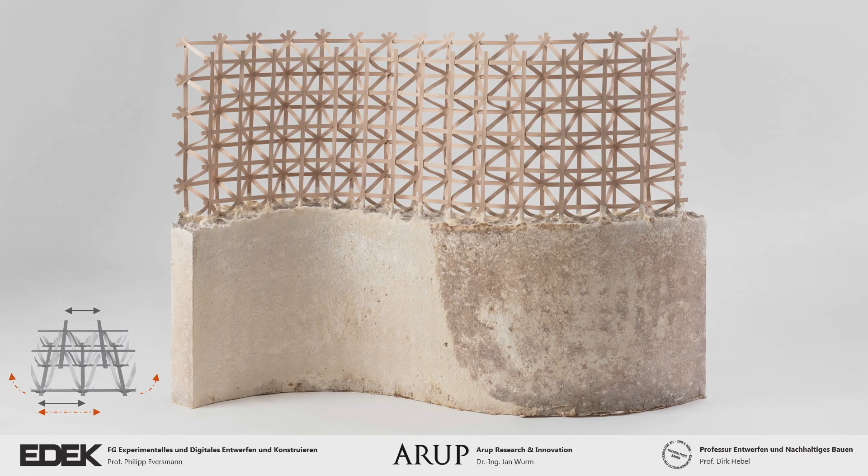We then wanted to see the design possibilities this lattice offers and produced a curved lattice. This single curved prototype was achieved by varying the distances between the veneer strips on the top and the bottom of the lattice. And to do that, we first designed the target geometry, and then we unrolled the lattice strips and welded them together to reach the desired curvature. Since modifying one parameter changes the geometry significantly, we went further ahead and decided to explore customizing the lattice cells, again attached to a wooden frame.

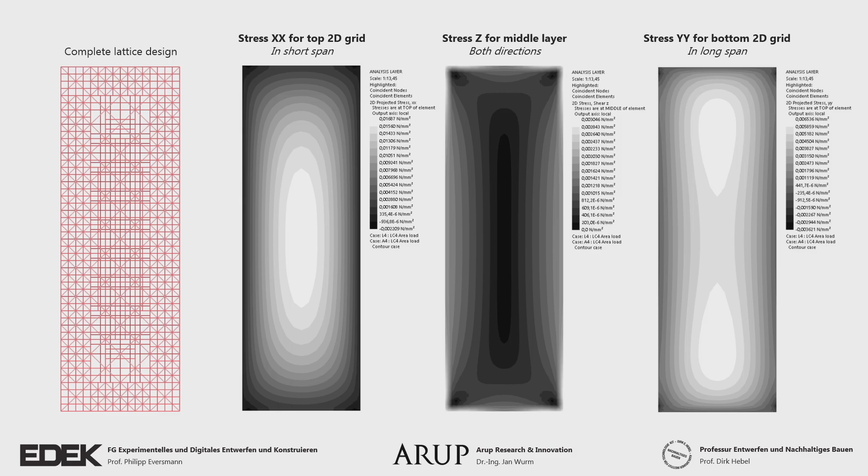Using structural analyses based on the requirements of a partition wall, we generated a lattice with 2 different cell sizes, and we used more veneer strips where we have higher stresses. We then took the cell sizes as a guide to reflect the inner reinforcement structure on the surface design. A wooden mold was used to add relief and texture to one side of the wall and to achieve acoustic benefits resulting from the surface design. Following the production of the lattice and the mold, we added mycelium and let it grow for about 2 weeks.

Here you can see the final outcome. We produced a custom reinforced bio-based mycelium composite with a surface design depicting the inner reinforcement structure. Our preliminary results have shown that the lattice and surface design correlation has an impact on the acoustic performance, potentially an opportunity to do acoustic performance tuning in the future. So this is a point we'll explore more in depth in the next steps of the research.

And through a series of tests, we validated the increased performance of the composite with the integration of the veneer reinforcement. Therefore, this opens up a new range of applicability for mycelium composites. And as an additional proof of concept, we decided to put the project team on the wall, because why not?

Now we'll see a video showing the whole production process from the beginning until the end. So we start the production by laying the veneer strips with a robot arm for first producing the 2D grids. Here you can see the simultaneous production of the mold. And then we add the waves that create depth, connect the top and bottom 2D grids, and also improve the shear resistance of the composite.

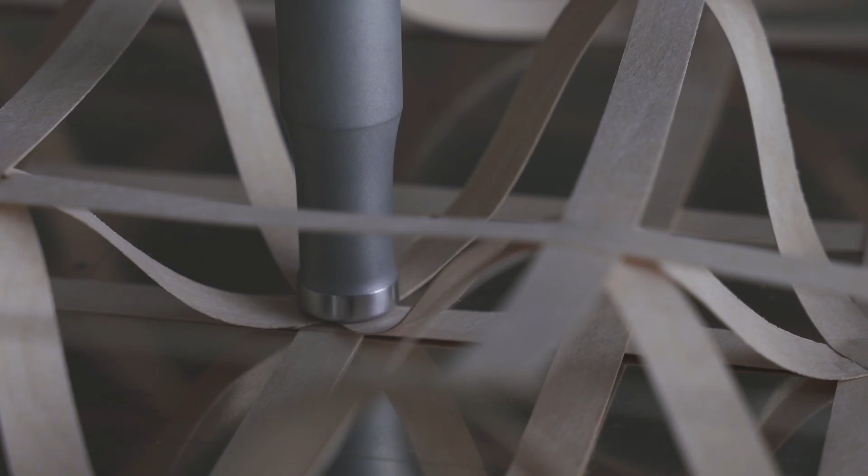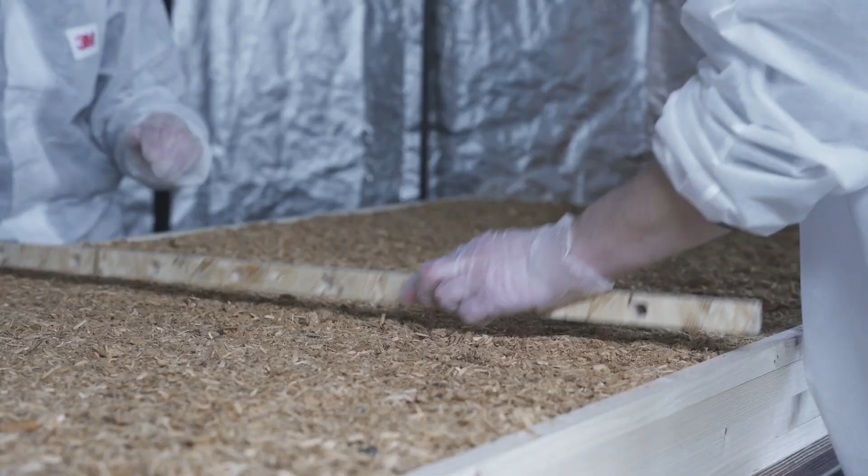All the veneer strips are connected with ultrasonic welding without using any adhesives. And we start preparing the inoculated substrate by eliminating the clumps as much as possible for filling. And here we're putting the material manually on the mold and in between the reinforcement lattice. Now everything is ready, and the mycelium is left to grow over the course of 2 weeks in a controlled environment.

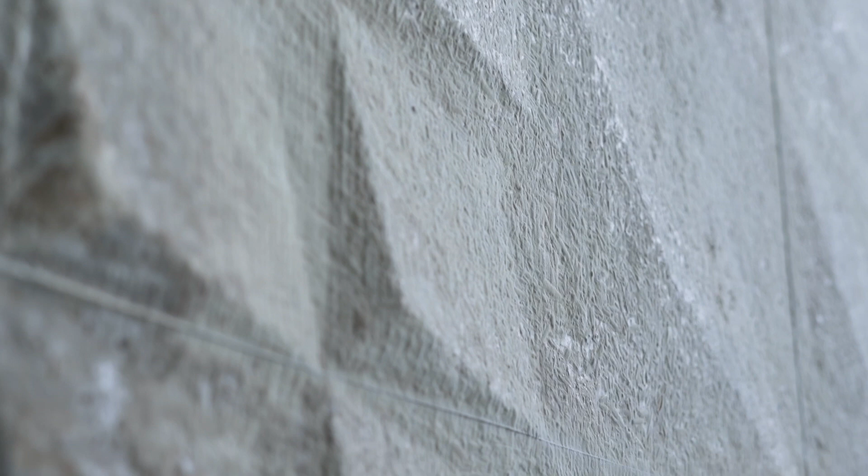Here you can see the mycelium growth time-lapse, where mycelium is expanding its dense network and connecting the substrate particles together. And at the end, we get a dry composite, and we actually installed it in our office to demonstrate its use as a partition wall. The entire project team.

So the next steps of our research are extending our production method to achieve double-curved, large-scale, complex mycelium-based composites. We'd also like to achieve functionally graded elements using different kinds of substrates in one component. And we're exploring the lattice and surface design relationship's effect on the acoustic performance. And lastly, automating the fabrication of mycelium composites even further.